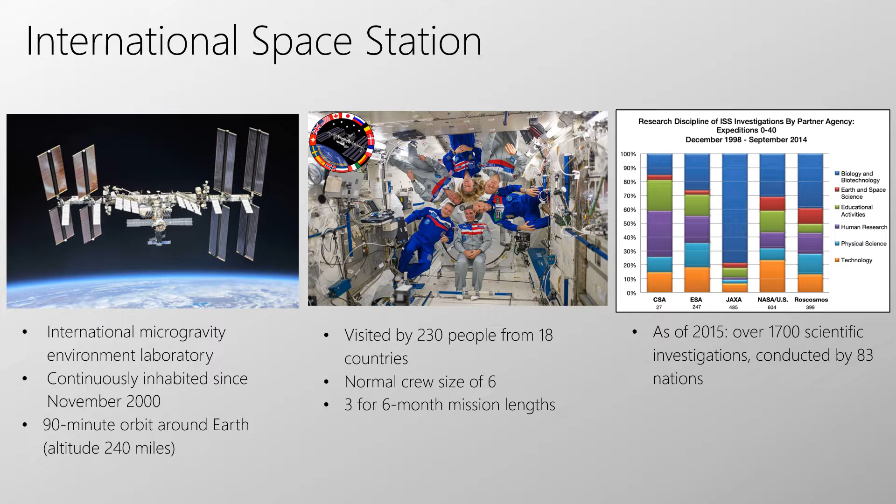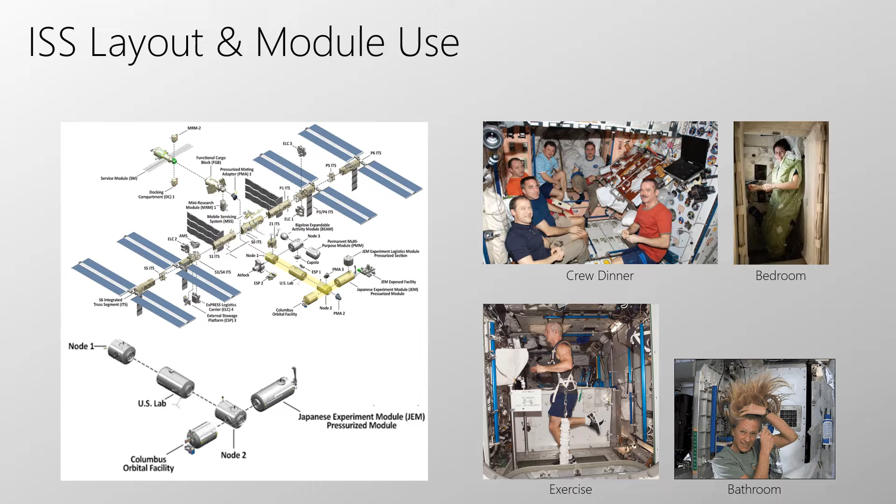Here you can see the layout of the ISS is comprised of modules connected together. Astronauts use these modules for many different things. So they live there and they work there. They have dinner there, they have their bedrooms, they exercise, they go to the bathroom, and therefore they have to clean it regularly.

These cleaning tasks involve about 2 to 4 hours of things such as cleaning handrails, wiping down communication panels, vacuuming, and we did a calculation for how much an astronaut's time is worth and found that it is about $110,000 per hour.

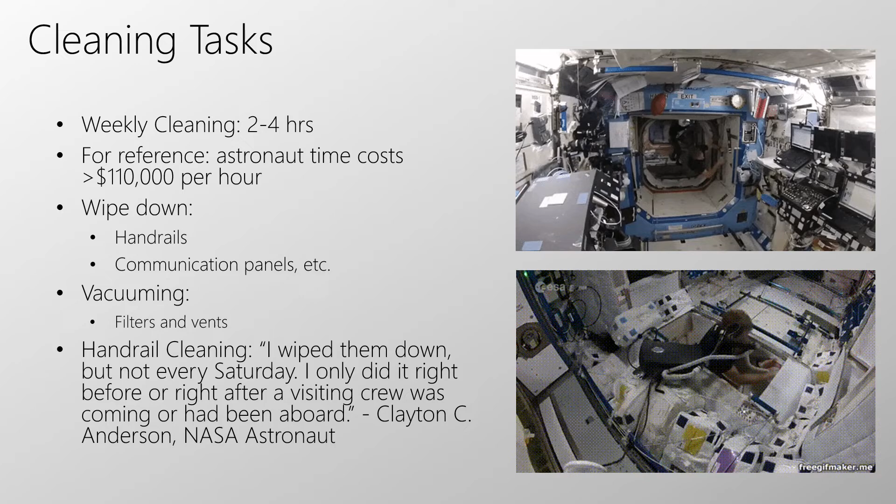Our team decided to have our servicing robot take on the task of cleaning handrails because we found that the handrails have a very known size, color, shape, and location inside the International Space Station. Looking at pictures found on Google Street View of the ISS, we can find where the handrails are and the surfaces they're around, so we can very clearly scope the project of cleaning these handrails with our robot.

To begin tackling our problem statement, we first looked into some pre-existing designs. When doing research, we focused on 3 different areas.

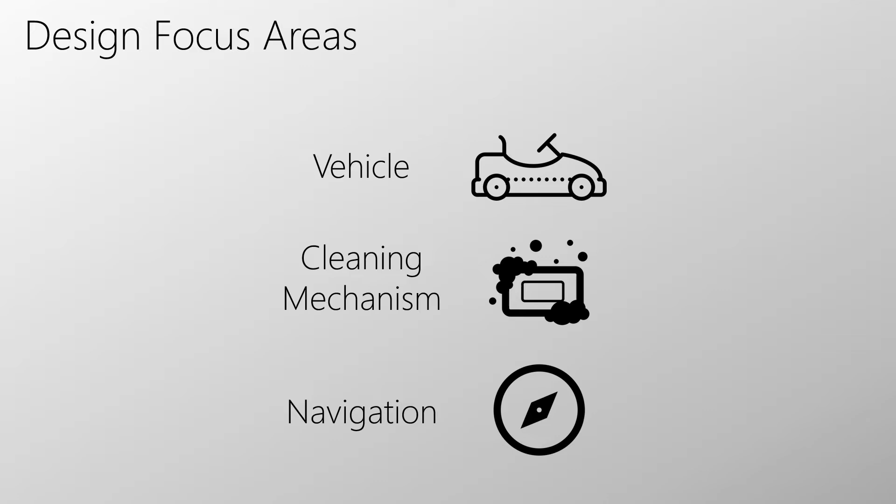The robot vehicle, which includes how our robot will move and adhere to the walls of the ISS in zero gravity. The cleaning mechanism, which indicates how our robot will autonomously clean each handrail. And navigation, how our robot will identify handrails, avoid obstacles, and know where it is within the ISS.

For the vehicle body, we looked into wheeled and legged robot designs for our locomotion technique. To adhere to the walls of the ISS, we examined using vacuum pumps, a pinching method, and a drone fan method. For navigation, we looked into using 3D LiDAR cameras, infrared sensors, and 2D RGB cameras. For the cleaning mechanism, we examined using a passive arm and a rail runner method.

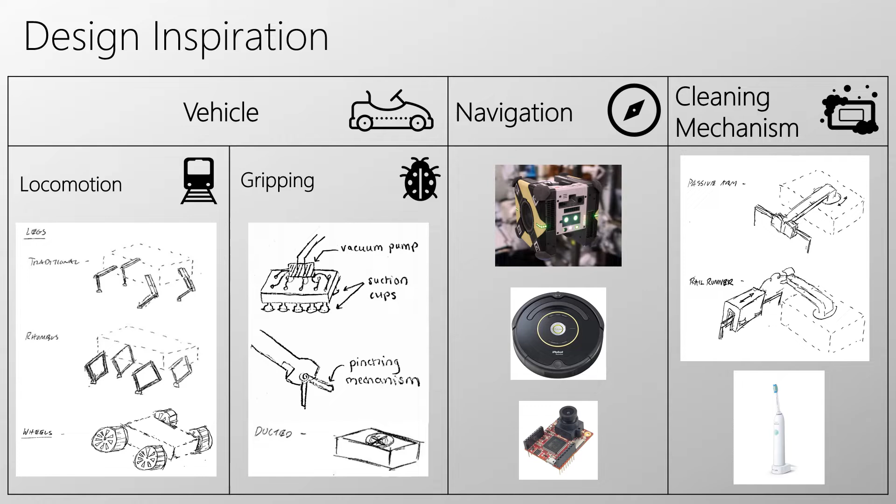The CAD for our final design is shown below. Ultimately, for the vehicle body, we decided to use wheels with tank-like drive and a drone propeller to keep the robot adhered to the walls of the ISS.

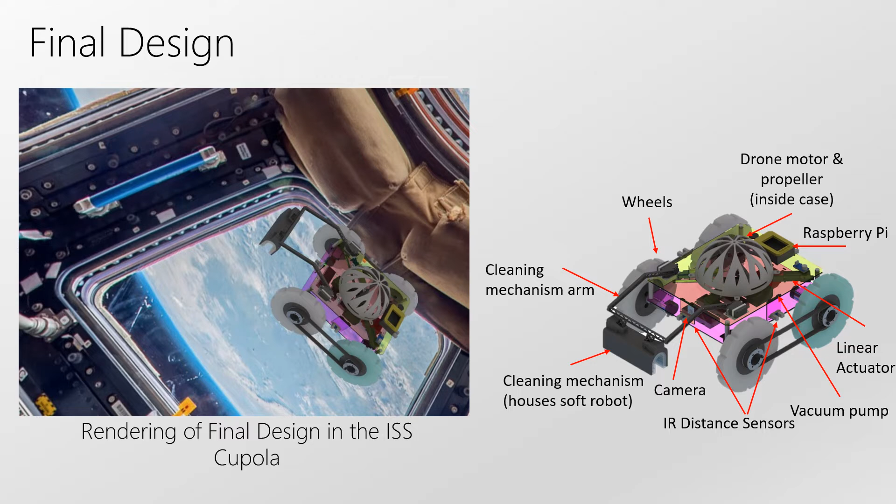For the cleaning mechanism, we decided on a passive arm that housed a soft robot that, when deployed, released fluid via a linear actuator and vibrated on the handrail like an electric toothbrush. For navigation, we decided to use a 2D camera for detecting handrails, infrared distance sensors for avoiding obstacles, and a LiDAR to achieve localization, all of which were connected to a Raspberry Pi.

Now we're going to get into some of the analysis we did to come up with our design.

To get a better understanding of the vehicle's size and shape, we first analyzed the vehicle wheel size, wheelbase, and ground clearance using simple geometric relationships such as the breakover angle, the approach departure angle, and the maximum curb height. The breakover angle and curb height are important for considering wheel size and ground clearance, and since we expect to drive over obstacles and curbs as tall as 3.5 inches high, we determined that our vehicle needs to have at least an 8-inch diameter wheel. This analysis also showed that our wheels must be the furthest forward object on our vehicle to accommodate wall changes.

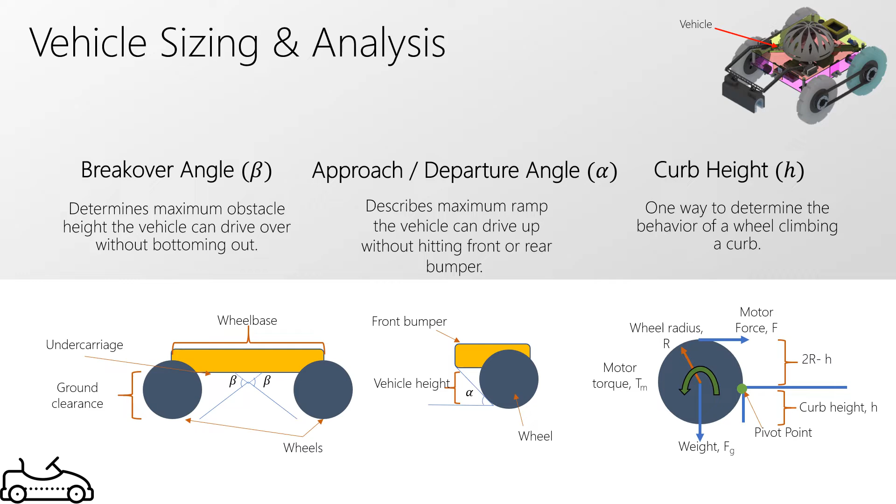Another aspect of the vehicle we chose to analyze was its ability to move from one wall of the space station to another. This is what we call maneuvering an internal corner or changing planes. In this maneuver, the vehicle must gain sufficient traction on its front tire to move to the second wall.

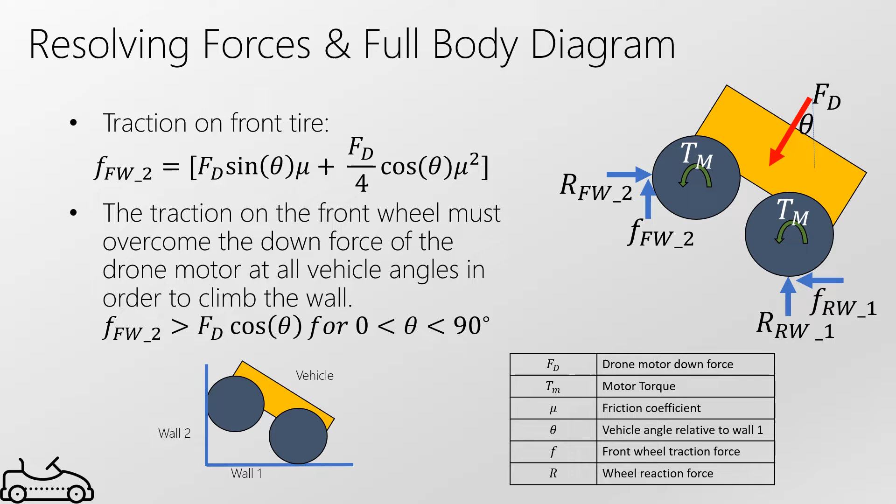To address this concern, we decided to analyze a similar situation in which we angle the drone motor to our advantage. In this diagram, the drone motor is forward biased, helping gain more traction on the front tire to complete the plane change. This analysis was promising, and we planned to incorporate it into our design after we built the initial prototype.

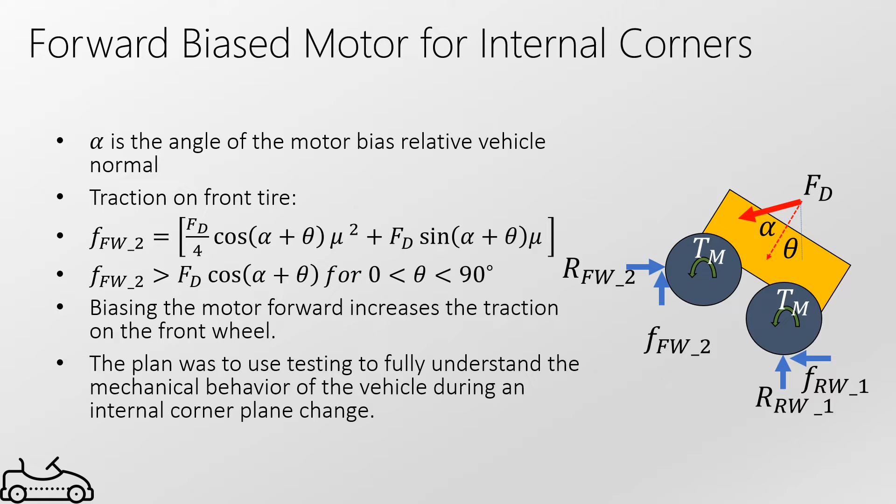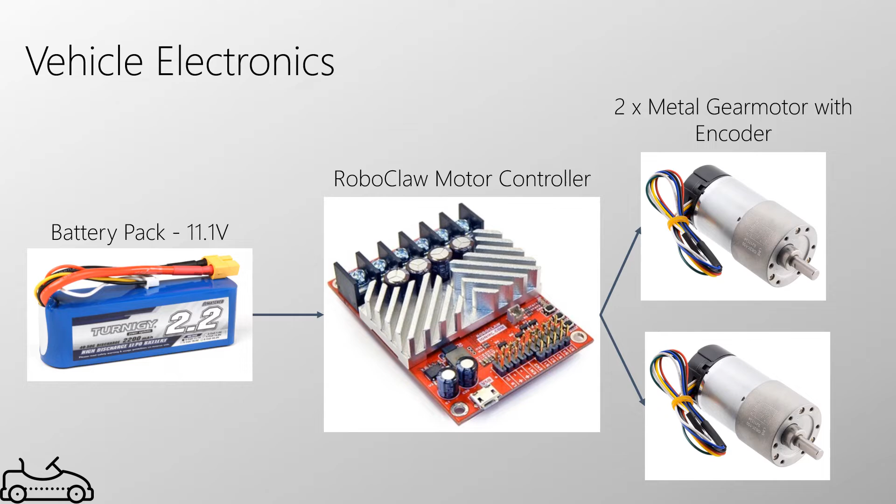Here are the main driving components we chose for the vehicle. A LiPo battery powers a motor controller, which is used to control the driving gear motors. The drone motor has a separate battery than the drive motors, and is controlled by this electronic speed controller.

We would have used a typical servo, like the one shown in the bottom image, had we ended up wanting to angle the direction of the downforce.

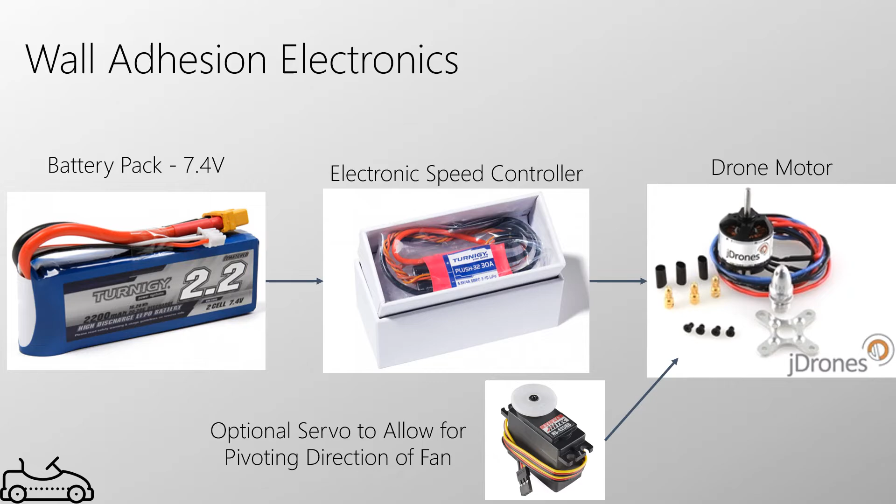When first designing our prototype, we had to plan for how we would end up testing the vehicle. In the diagram, the large light blue rectangle is a wall, and the vehicle has been turned onto its side. The small blue rectangle on the bottom is an air puck, which shoots a stream of air downwards to gravity offload whatever is sitting on top. This would allow us to test maneuvers such as internal corners, driving over obstacles, and our cleaning protocol to ensure these functions could be performed without losing contact with the wall.

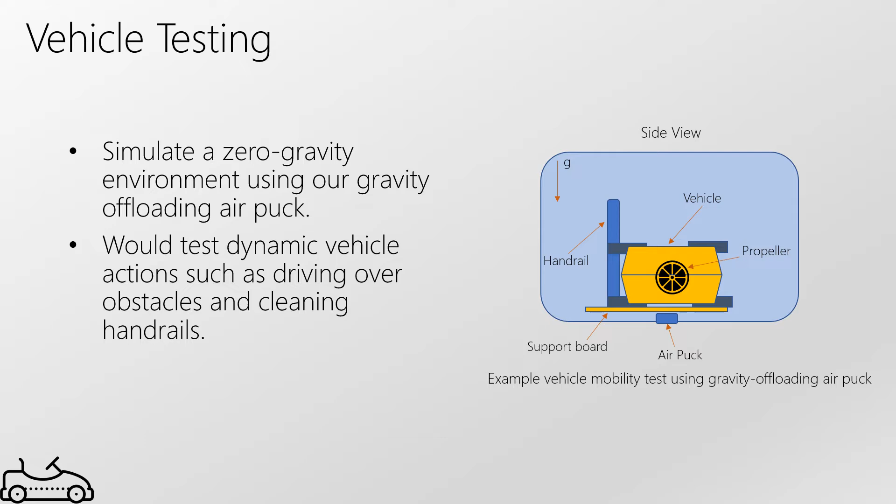Due to the global situation we are currently facing, campus closed early, which affected some of our plans for building and testing our project. Though we were unable to perform this testing off campus because it necessitates the use of compressed air, the team found other ways to construct and validate the design, which we will talk about later on in this presentation.

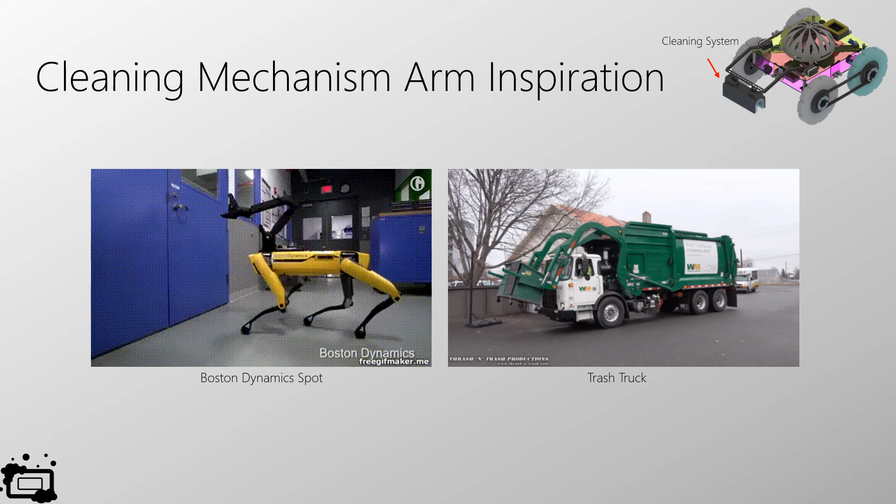Originally, we considered a more complicated robotic arm to deploy the cleaning mechanism like on the Boston Dynamics Spot. We proceeded with a 1 degree of freedom arm similar to a trash truck to minimize complexity.

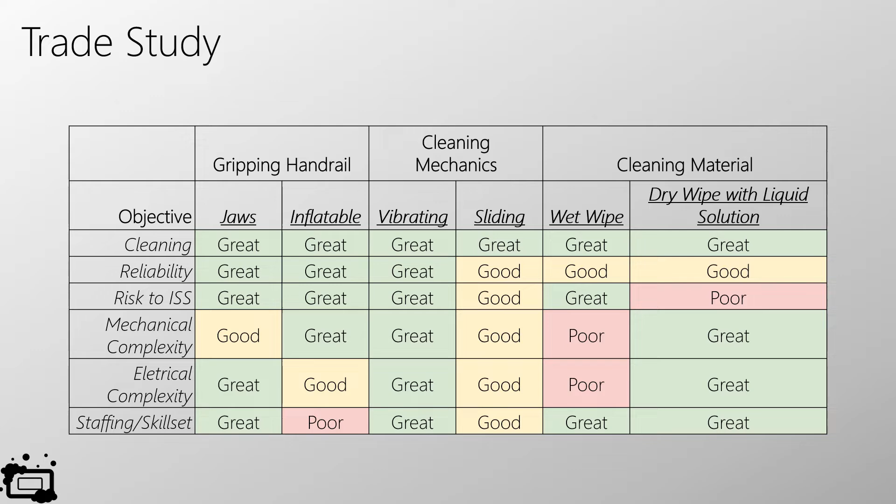In order to decide on the most effective cleaning mechanism, the mechanical team ran potential designs through a trade study. To start, subsystems were assessed for criteria such as cleaning and mechanical and electrical complexity. For example, our baseline and alternate methods of gripping handrails were mechanical jaws and a soft robot inflatable. Factors such as the number of moving parts and the team's skill set made an impact on their score.

We used our best engineering judgment to rank those criteria in order of importance to the mission. We were then able to quantify the effectiveness of each subsystem and down-select.

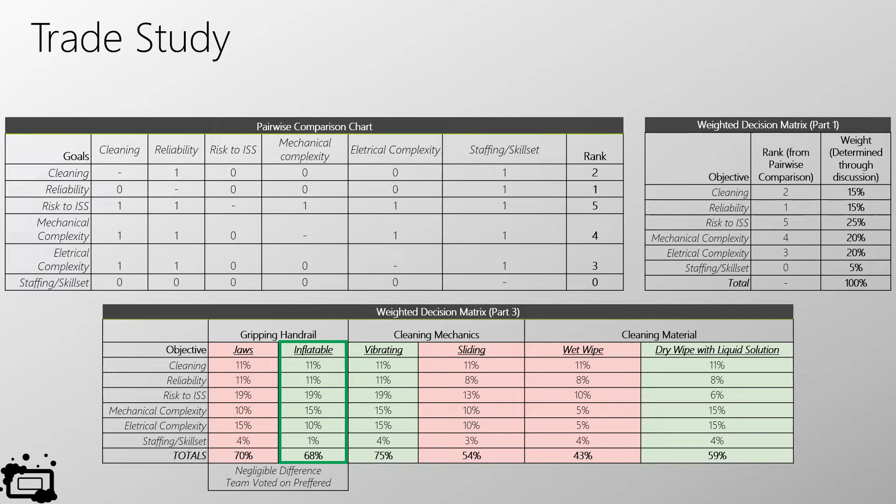We've decided on a soft robot that can inflate to grab handrails. A dry cleanroom wipe is installed on the white clips. Once the mechanism is secured on a handrail, embedded vibe motors similar to what's found in your cell phone provide mechanical cleaning like an electric toothbrush. And perforated tubing brings cleaning solution to the wipe.

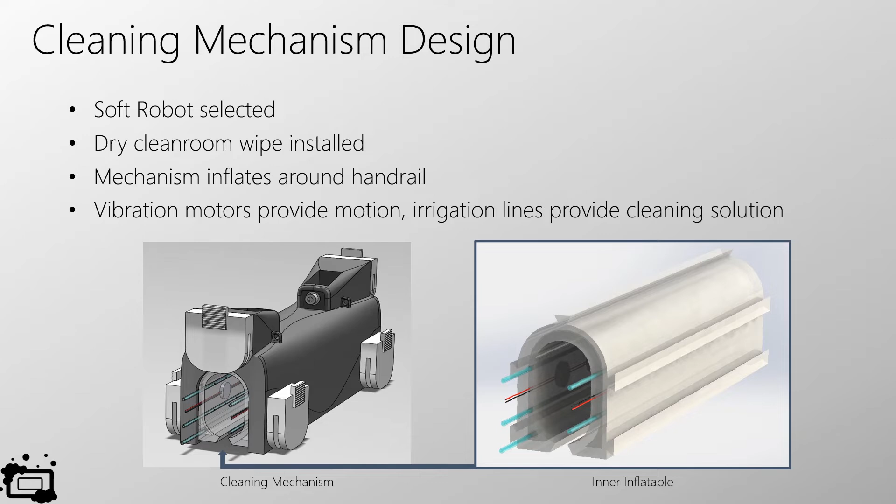Our trade study identified an issue with disinfectant wipes drying out too fast, and designs to pull fresh wipes from a canister and clean all sides of the handrail scored poorly.

Here's what the soft robot looks like inflated unconstrained. If it were inside of its housing, it would constrict inwards on a handrail.

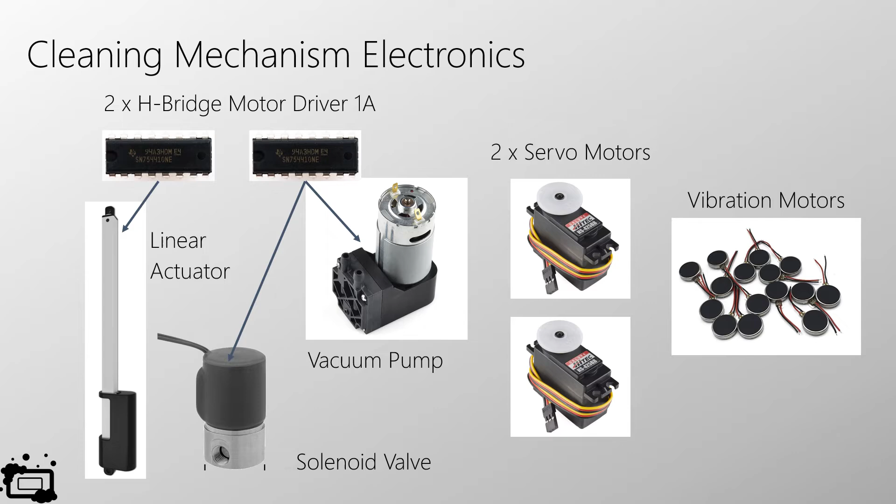Fluid is dispensed with a custom syringe pump mechanism powered by a compact linear actuator. The soft robot is inflated with a pneumatic system comprised of a 12-volt vacuum pump and a solenoid valve. The trash truck arm is lowered with 2 servo motors, and mechanical vibration for cleaning is created by vibe motors.

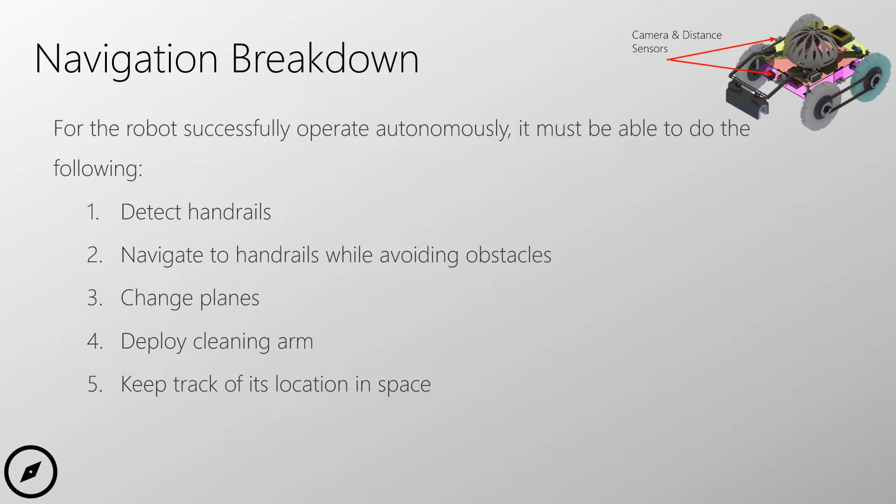To tackle our navigation analysis, we first examined what requirements the robot must satisfy to operate autonomously. These included detecting handrails, navigating to handrails while avoiding obstacles, changing planes, deploying the cleaning arm, and keeping track of its position in space. The first major software hurdle was identifying these blue handrails.

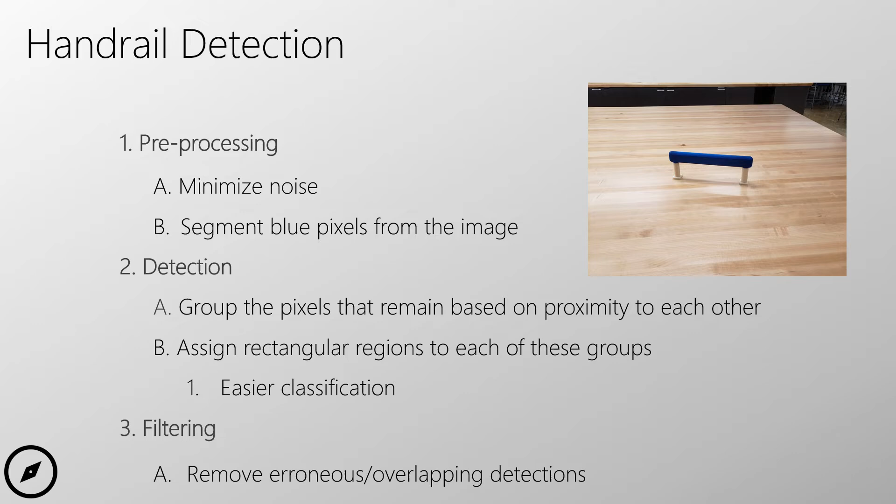Here we have the actual output of this algorithm. The red bounding rectangle is then stored and passed on to the rest of the application.

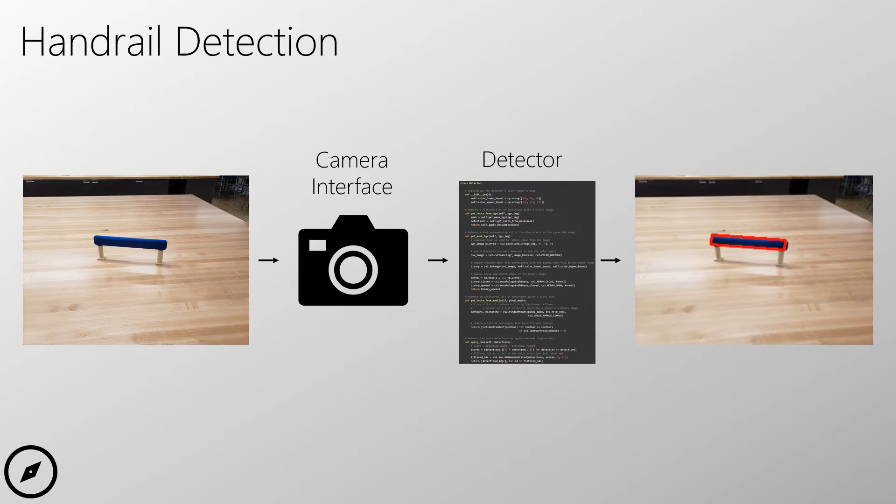To avoid obstacles, we purchased 2 different types of sensors. The first was a passive infrared motion sensor, which detects moving obstacles, such as astronauts, and the second was an infrared time of flight sensor to detect static obstacles.

To localize the robot, we decided to use a simultaneous localization and mapping methodology, otherwise known as SLAM. There exist several different open source algorithms for SLAM, but ultimately we decided on using Breezy SLAM, as the code was lightweight, the LiDAR was relatively cheap, and it was the easiest to integrate into the code base we created.

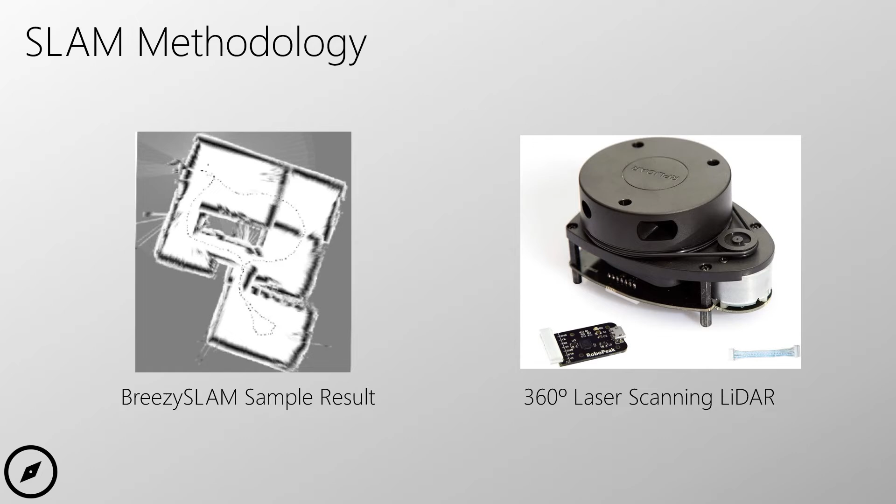To organize our code, we first developed a state diagram. The state diagram describes the state the robot will be in at each moment and what algorithms it will be implementing. So the robot will first start in the searching for handrail state.

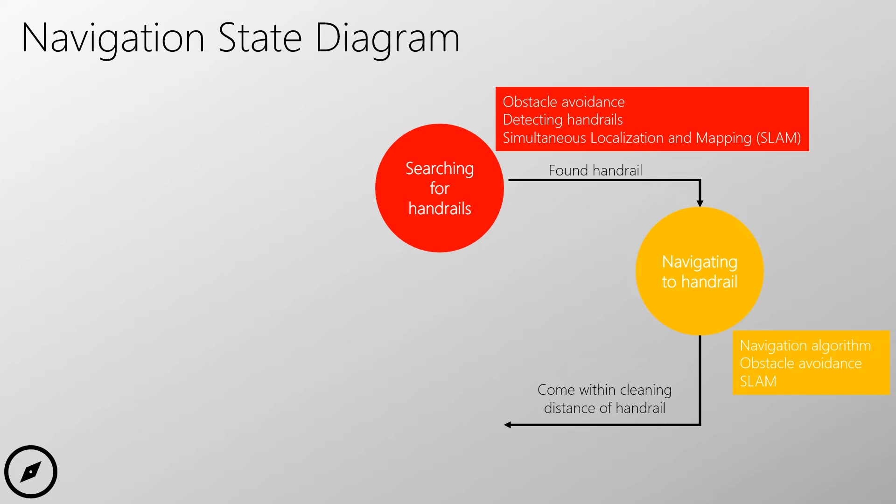While it's searching for handrails, it'll be avoiding obstacles using SLAM and trying to detect handrails. Once it's found a handrail, it will begin navigating to the handrail using a navigation algorithm that we will develop, all while avoiding obstacles and using SLAM.

Once it comes within cleaning distance of the handrail, we will deploy the cleaning arm. We'll position the arm along the handrail to completely clean it, and we'll retract the arm when cleaning is finished. If there are more handrails to clean on the current plane, then we'll go back to searching for handrails.

Otherwise, if we cleaned all the handrails on the current plane, we'll move to the next plane. Moving to the next plane involves finding the plane edge while avoiding obstacles and using SLAM, and adjusting the wall grip so that we can move to the next plane once we've arrived.

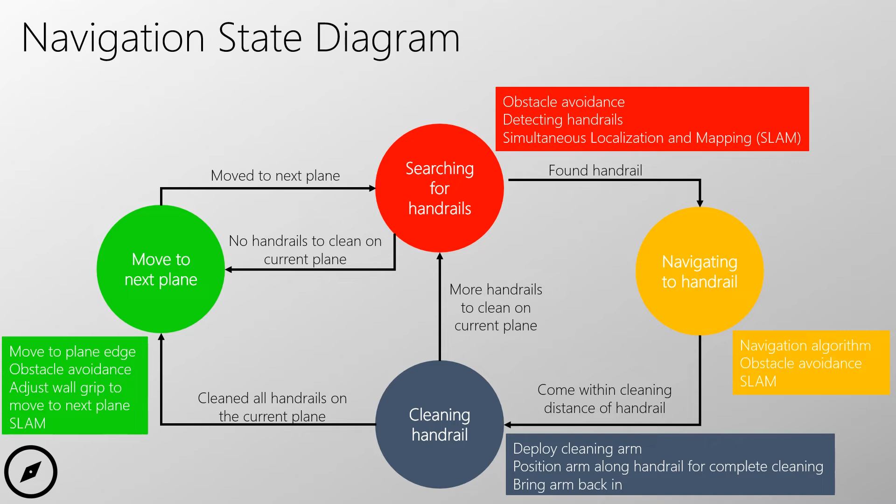To program this, we decided to use Python as a matter of convenience and to speed up development time. Additionally, we decided to handle image processing with OpenCV, an industry standard open source computer vision library. All development was done via SSH session on a Raspberry Pi 3.

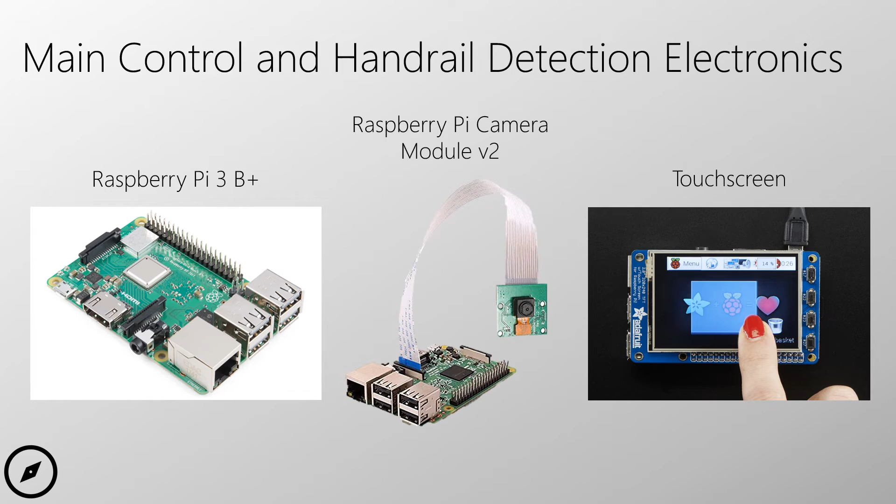We also used the Raspberry Pi camera module. A touchscreen was fitted to the Raspberry Pi so that we could perform motion tests without it tethered to a laptop or monitor. Now that we've covered all of our designs, we're moving on to the steps we took towards producing them.

Sections of the soft robot are cast in molds containing any embedded features. Multiple sections can be bonded together with more silicone with an airtight seal.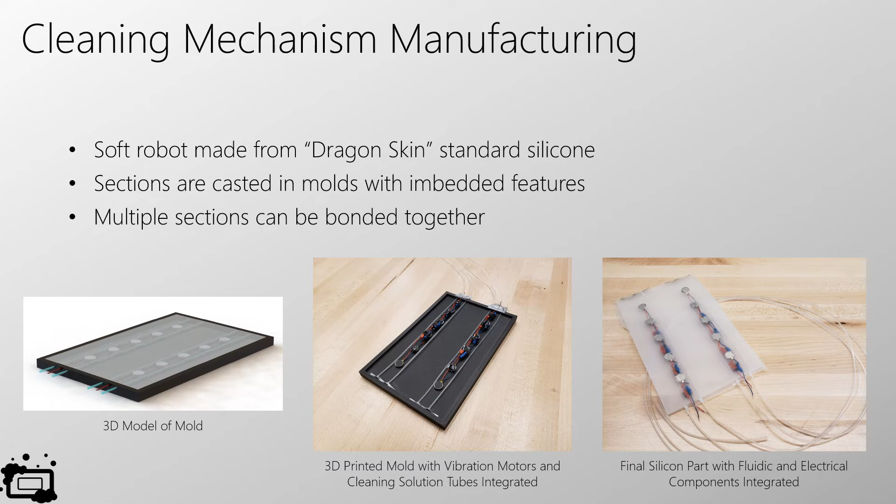Silicone is made from a two-part mixture. It can be poured into the cavity of the mold and cures after 24 hours. We pull vacuum on the molds to ensure that no air bubbles exist in the walls. With some clever mold design, we can make more intricate parts.

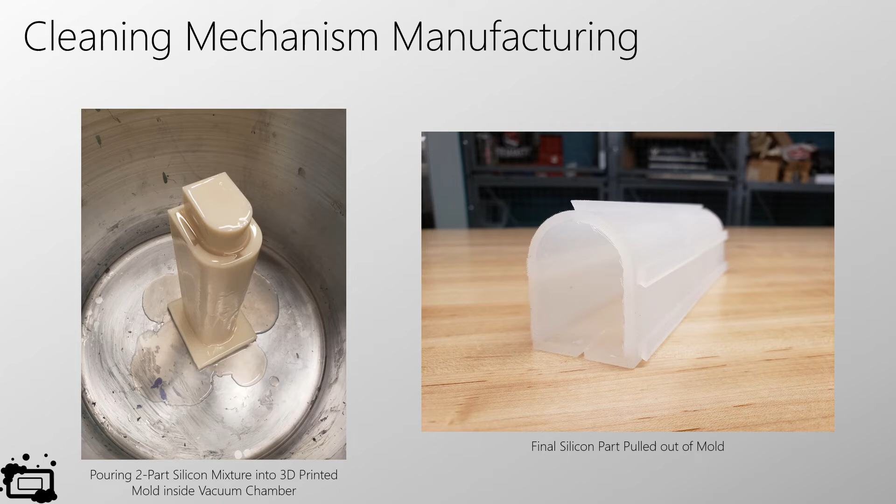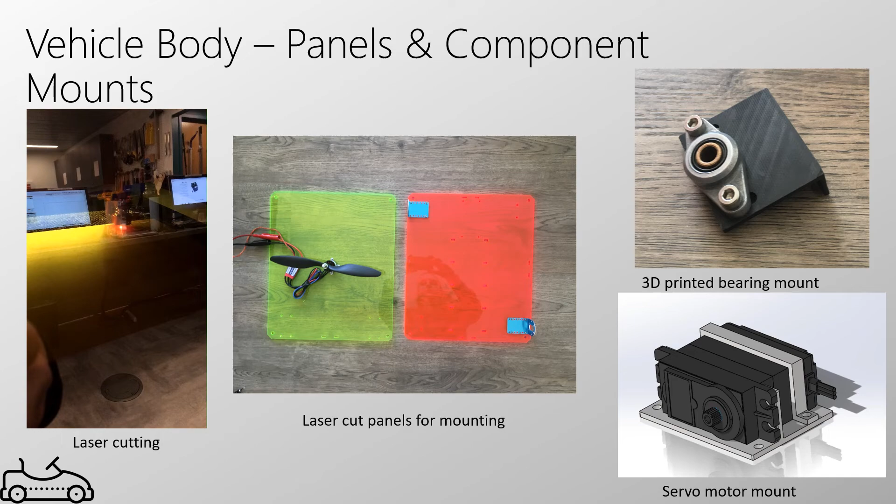To begin manufacturing the vehicle, we laser cut some sheets of acrylic with all the mounting holes for various components. On the right, you can see an example of some mounting parts that we designed that were 3D printed. The goal of creating parts using rapid manufacturing techniques such as laser cutting and 3D printing was to allow for quick design iteration during testing.

With the same silicone we used in the soft robot, we were able to manufacture our own wheels. The wheel hub and mold were 3D printed, and the mold created cutouts that improved the flexibility of the wheel. On the right, you can see the pulleys mounted to the 3D printed hubs with the timing belt in between them.

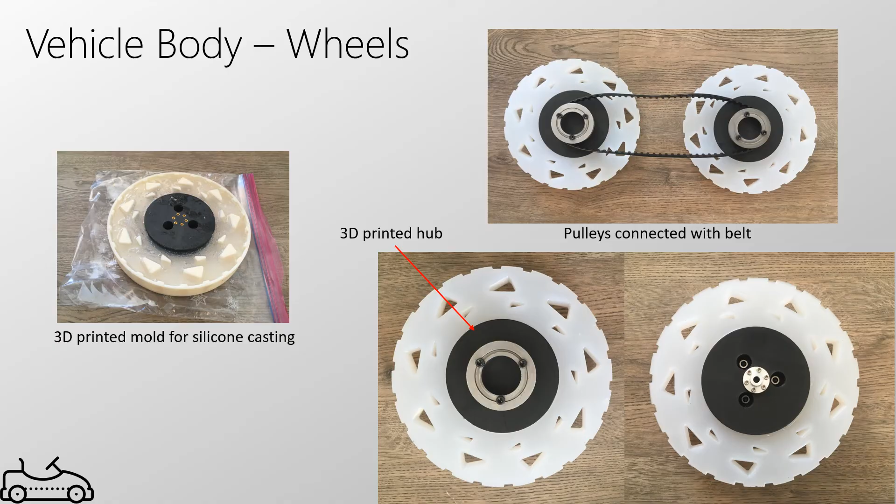You can see here this is a final electronics board where we brought together all the electronics for the different parts of the vehicle. So we have the two motors that drive the vehicle and their motor controller.

We have all the cleaning mechanism electronics, which includes a linear actuator to push the syringe, a vacuum pump to inflate the soft robot, and a solenoid valve to basically hold in the air of the soft robot when it's inflated.

We also have all of the wall adhesion electronics, which includes a drone motor and propeller, controlled by an electronic speed controller. Finally, what is controlling the whole thing is a Raspberry Pi, which is in the navigation electronics section. We also have some sensors there, including a motion sensor and a camera to detect handrails.

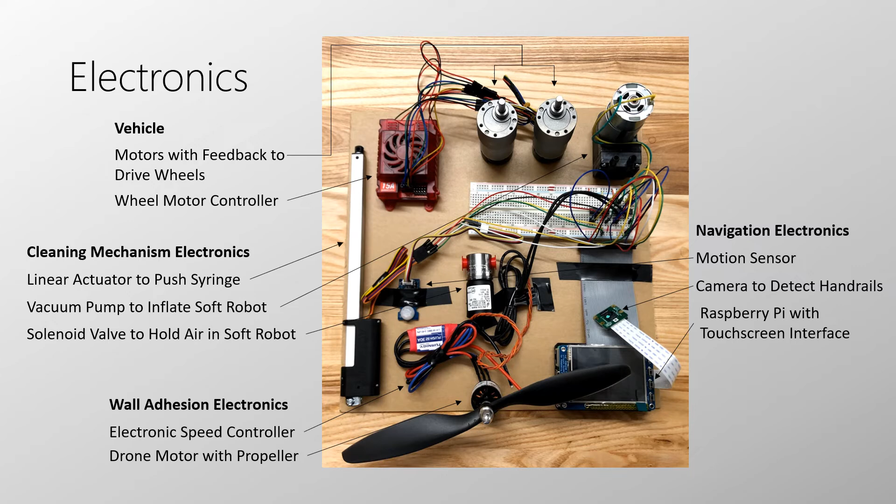Throughout the spring, the electronics and software team were working together on developing the robot's ability to navigate its surroundings. Before group work was halted, the team was able to construct a control architecture for the code base, develop and verify the handrail detection algorithm, and begin implementing SLAM and the code to control the wheels.

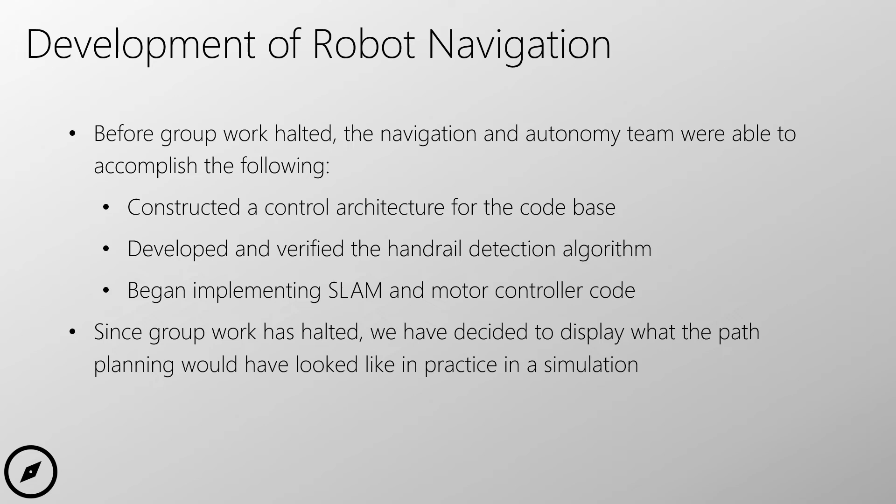However, most of these tasks were not fully realized. Since we have not been able to work in a group, we have focused our efforts on displaying in a simulation what our path planning algorithm would have looked like.

This diagram shows the navigation control architecture we created. This control architecture will implement the state diagram previously shown. The main controller class interacts with three larger classes: the map interface, the handrail locator, and the hardware controller.

The map interface will house the SLAM implementation as well as the obstacle avoidance algorithm. The handrail locator consists of the handrail detection and ranging algorithms. The hardware controller interfaces with all exterior hardware that give feedback to the robot as well as help the robot complete its tasks.

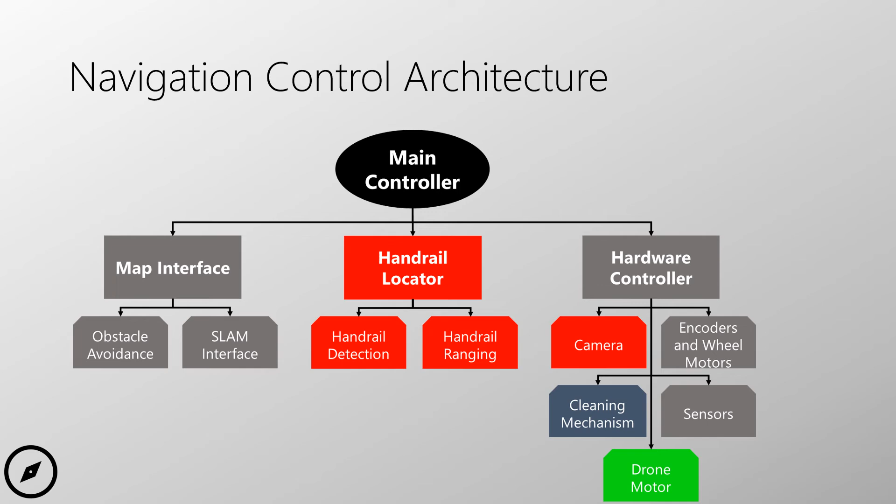In order to navigate toward handrails, we need to estimate their position relative to the robot and its camera. This is done by comparing real-time handrail detections with detections from a bank of calibration images. These calibration images are gathered using our robot's camera setup and our own mock handrail at various known distances.

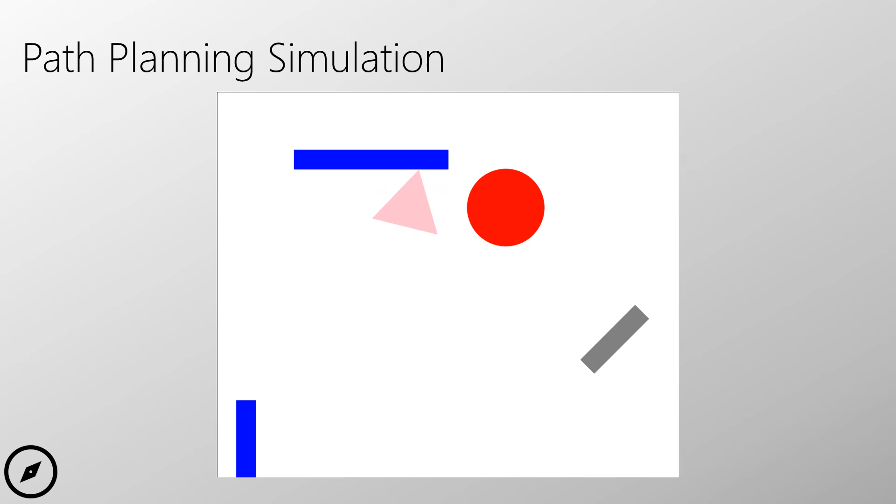This animation illustrates the path planning strategy that would be employed by the robot. First, it orients itself perpendicular to the handrail, then it approaches the handrail and applies the cleaning mechanism. For long handrails, like the one at the top of the animation, the robot will clean the handrail in discrete steps, reapplying the cleaning mechanism each time.

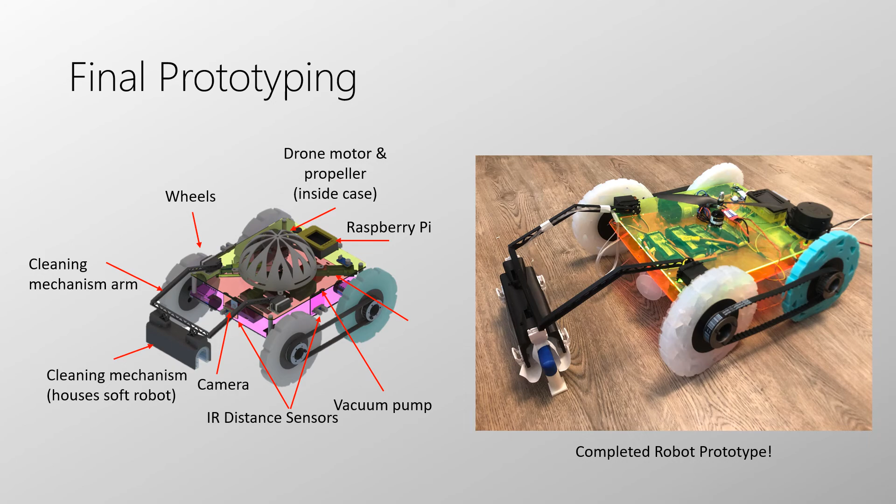Due to campus shutting down for COVID-19, we had to do our final prototyping at home. But you can see we were still able to create a basic prototype of our robot on the right.

Looking more closely at the robot, the top level has the drone motor and the propeller. It also has the main controller, the Raspberry Pi, and sensors like the camera and the LiDAR sensor. The middle plate houses the battery packs, and houses all of the system needed for the cleaning mechanism.

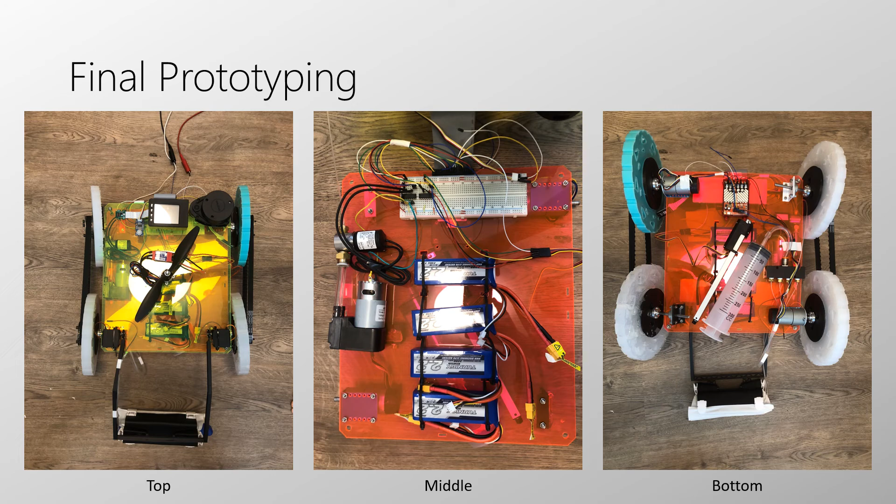It has the pump and the solenoid valve to inflate the cleaning mechanism. On the bottom plate, we have the cleaning mechanism syringe and linear actuator control, the syringe being for the fluid part of the cleaning mechanism. Additionally, we have the RoboClaw and the two Pololu motors, which drive the tank wheels.

Now you can see that we performed a driving test. If we were to do more development, we would play with the wheels and the casting process to make them a little more rigid so they wouldn't be as wonky as they are right now.

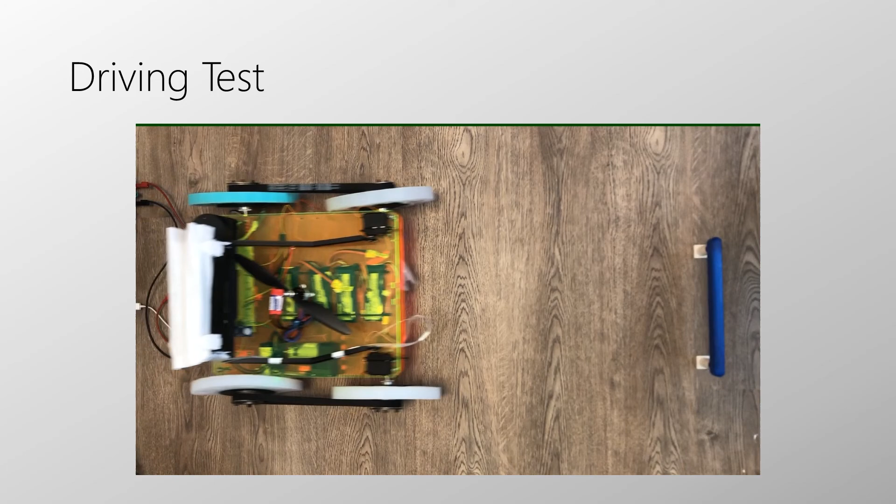Finally, we also did drone motor testing. This is what would be used to keep the robot against the wall in the ISS, and we found those fully operational.

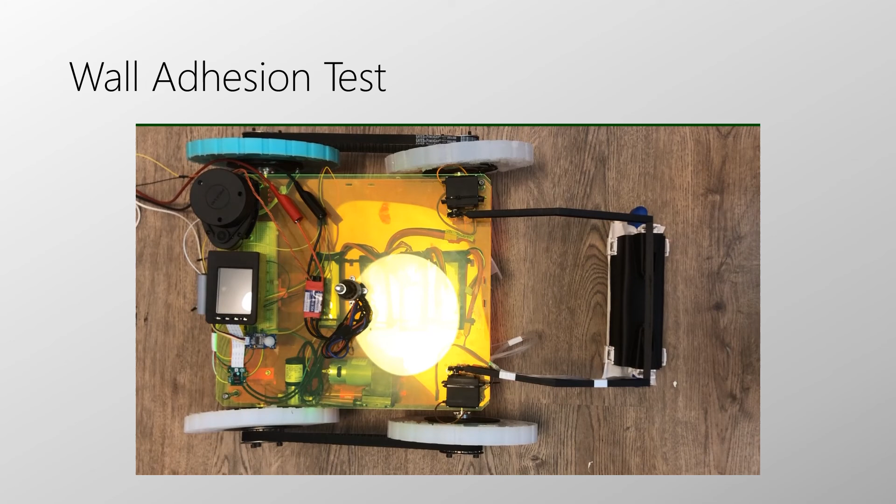Now we're going to get into some of the project's management details. In order to stay on track with this project, a requirements tree was constructed. There are branches for autonomy, cleaning, navigation, and functional requirements. The requirements become more and more specific the further down the branch. They were written as specific as possible, with no bias to one specific design solution.

We have a few examples to showcase how we qualify to our requirements. Let's start with acoustic analysis.

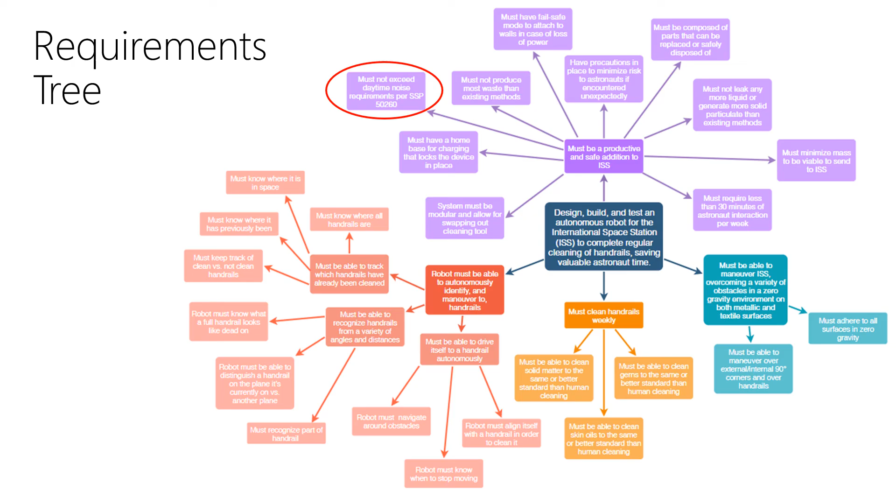The robot is held to the walls with a fan, which is the loudest component. It is important to adhere to ISS environmental requirements for noise. It is imperative for us to compare the noise created by the robot to the noise criteria curve specified in the ISS requirements document.

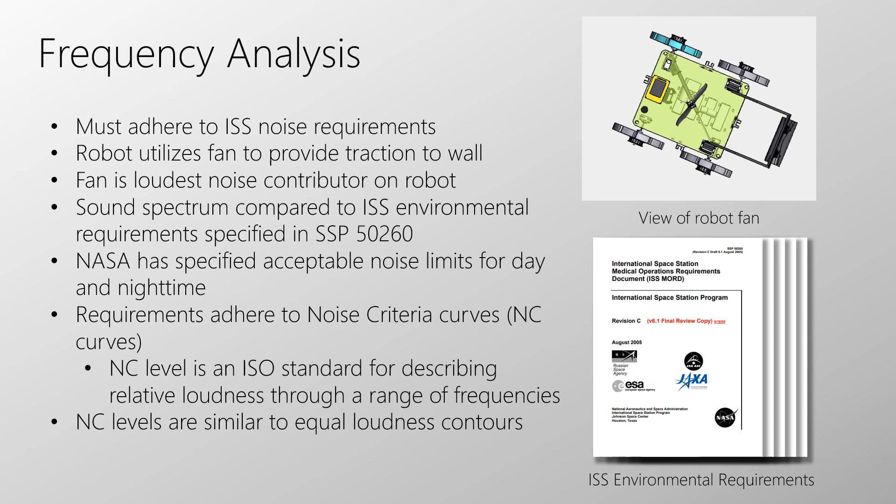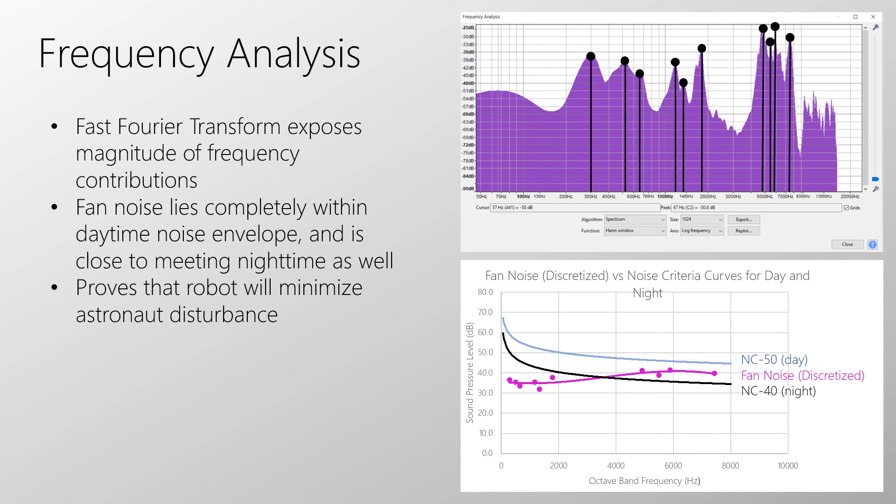We recorded the fan running at steady state and performed a fast Fourier transform in Audacity. We also recorded the sound pressure level with the Phonometer app to appropriately scale the recording afterward. The FFT spectrum was discretized to its 10 highest contributions. We found that we adhered to the daytime noise requirements and almost make the nighttime as well. We plan to only use the robot during daytime, so this is satisfactory.

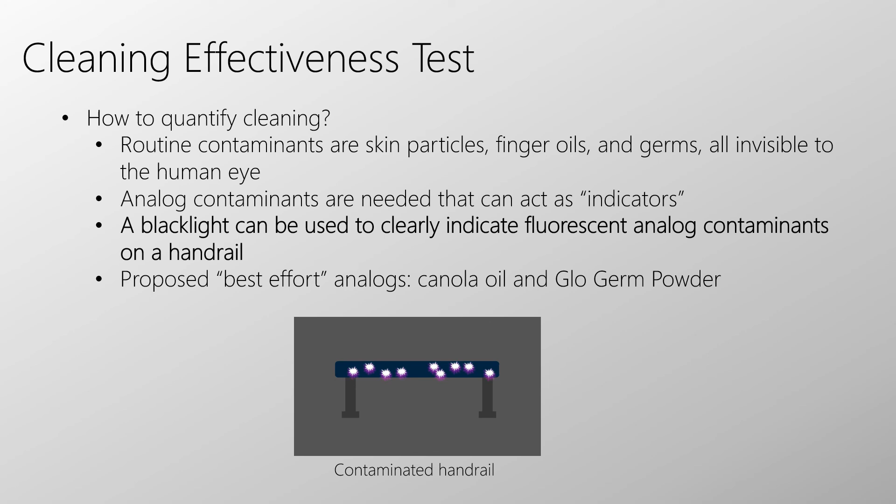We also devised a test to quantify the effectiveness of our cleaning method. While the routine contaminants we will encounter, skin particles, finger oils, and germs, are all invisible to the human eye, we can contaminate a handrail with fluorescent analogs and count the number of white pixels under black light.

Unfortunately, campus closed before we were able to conduct this test, so we've manufactured data to show how it works. Contaminated handrails would be cleaned both by hand and by the robot, and a comparison of the percentage of white pixels left would signify the winner.

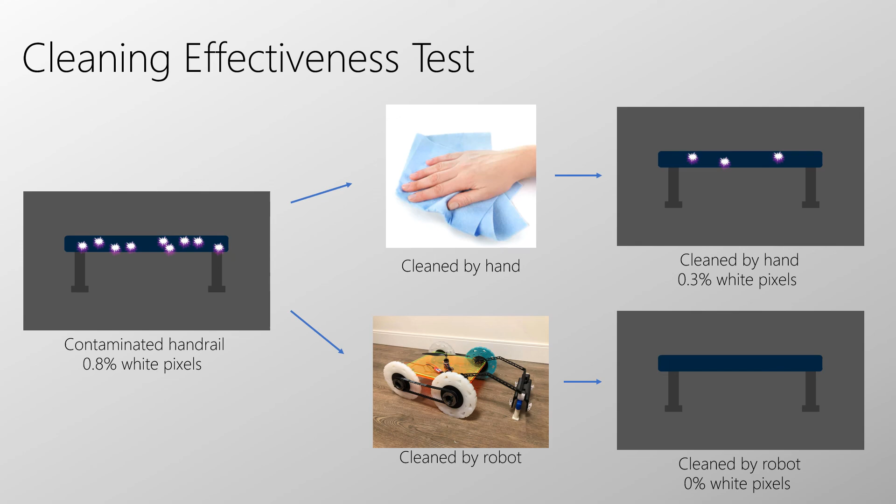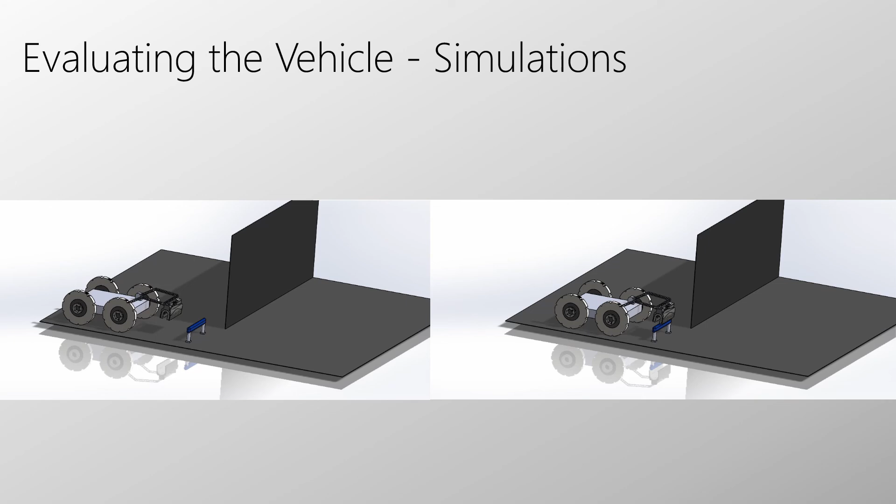Here is an animation of the robot performing the plane change maneuver. As you can see, the cleaning mechanism would be in its retracted state for this maneuver. Though this simulation verifies that the footprint of the robot would be able to complete this maneuver, testing with the physical prototype would have allowed for a better understanding of the impact of the drone motor downforce and its effect in this critical part of the robot motion.

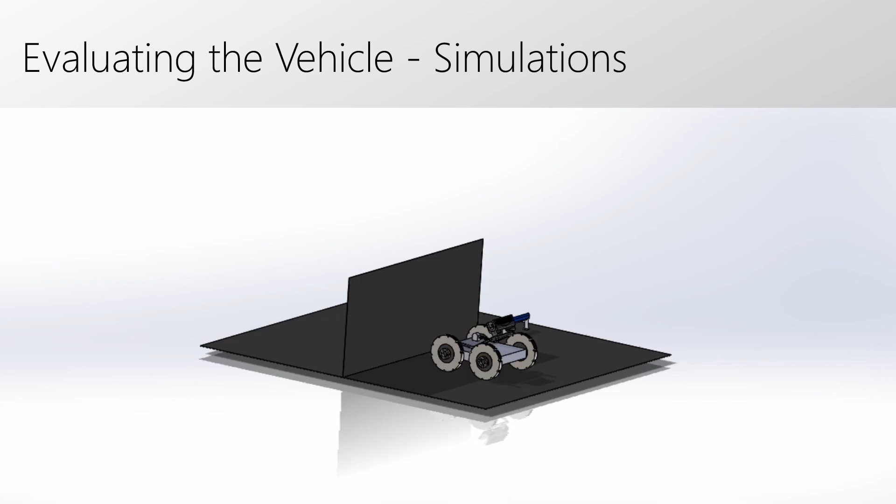The air puck we are going to use for testing has a recommended mass range. Summing the mass of the components on the robot and estimating the total mass of hardware needed, the robot would be below the recommended weight for the house air pressure of 60 psi on a smooth testing surface. This shows that we would need to add ballast to the robot for proper stability.

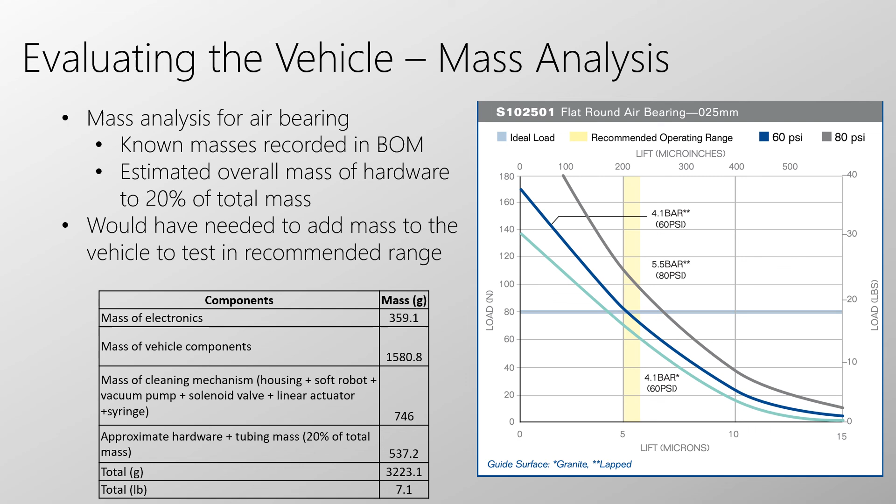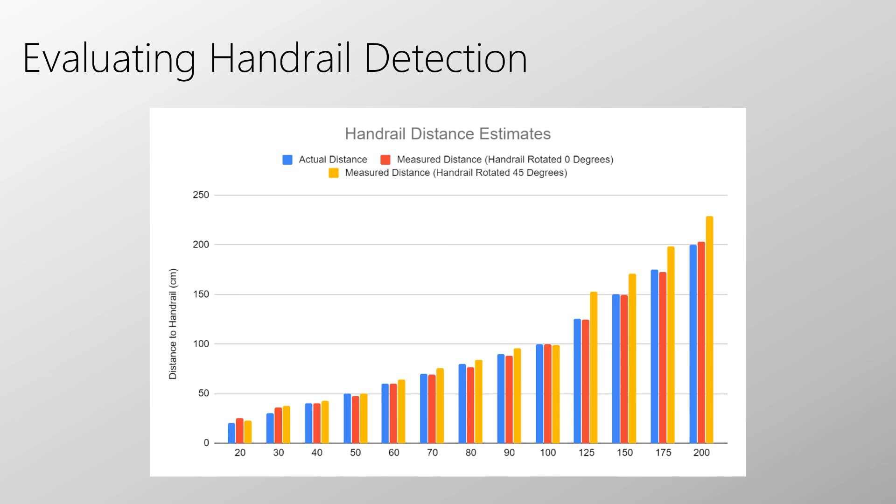Here we have our evaluation of the handrail detection algorithm. Handrails were placed at various distances listed along the x-axis in two different orientations, shown here in red and yellow. We then executed the entire handrail locator module several times for each test case and averaged the distance estimations that we found. While this data showed promising accuracy, given the analysis we've done, these are the features of the project that could be improved moving forward.